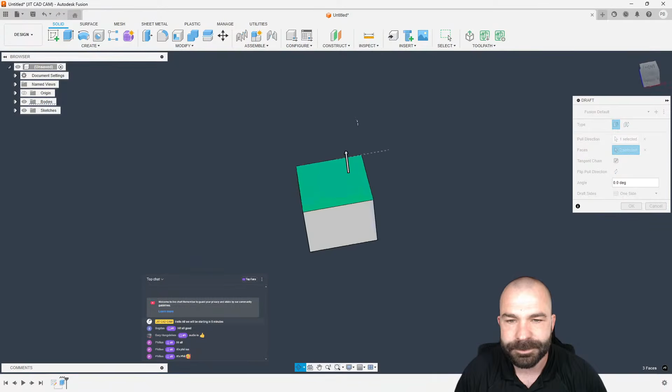But all right, so the first thing that came in just this morning is a customer reached out about tapered end mills and possibly some problems. So what I'm going to do here real quick is draw out a simple part with some tapered walls to it, and we're going to see if the simulation actually looks proper, as I was requested. So again, just a 3x2 block. We're going to throw some draft on these walls. We're just going to give it 15 degrees of draft.

Now, the toolpath that they're using is the ability to use a taper end mill on the manufacturing side of things. So let's get our setup going. We're going to have to create an end mill for this, but presumably you're going to utilize something like 2D Contour. I'm going to create a tool from scratch, and this is just going to make my life easier because it's not a flat end mill, so it should be a tapered mill. Let's scroll down through here and get a 1/4 inch diameter at the tip.

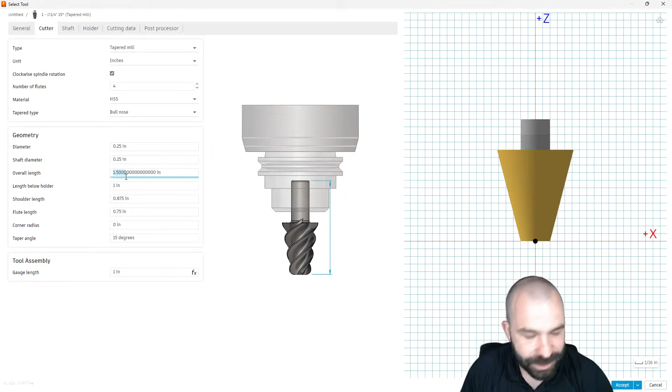Now, I think one of the problems they may have had is, I can never remember, is the tapered angle the inclusive angle or is it just the one side of it, right? So there we go, 15 degrees, no corner radius. I'm going to do a 3-inch length, 2 inches below holder. Actually, we're going to have to go a little more than that, 2.5. And a little copy and paste Hollywood magic. Who doesn't love that, right? So as you can see, there's my end mill. Let's bump that length up a little bit more.

Now, from that, we're going to go ahead and presumably be able to machine those edges that we're going to select. So again, I'm going to pick not the entire chain, but just one segment. For those of you who don't know, you could hold the Alt key and pick one edge. Now, presumably, this is where we find out what is the actual 15 degrees we're looking for here.

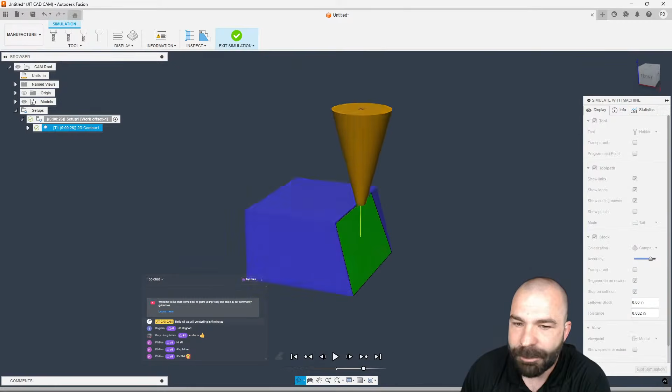Because if I go ahead and machine, the 15 degrees I plugged in was actually the taper of one side. So this would have been a 30-degree end mill. But what I'm seeing is it's actually machining and showing me everything all clear.

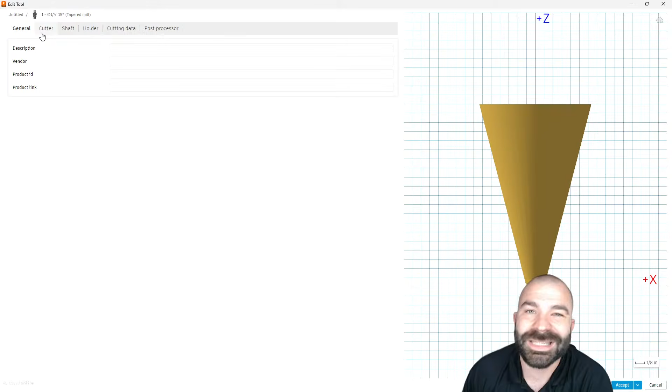Cameron, if you're out there, I know I told you we're going to kick this one off with your problem, but I could assume that maybe your tool was set wrong. I know he was also questioning, maybe I should just do this as a multi-axis swarf toolpath, and we can visit that as well. But as you're seeing here, the taper angle in this case isn't both sides inclusive. So this would actually be a 30-degree end mill. It's 15 degrees as in just one side of it.

So again, let's go ahead and lengthen our chain out now. I'm going to do a little double click here. We're going to grab that other side. And then I can go through and maybe extend that out to 50, just so we don't start our cut directly on our part. And I have my stock turned off, so let's get that stock turned on. As you guys can see, we're coming down and machining with the tapered end mill around our part.

So again, maybe that works, maybe it doesn't. Phil out there, we're just Phil. I like it, works good for me. I'm also just Phil, as most people know.

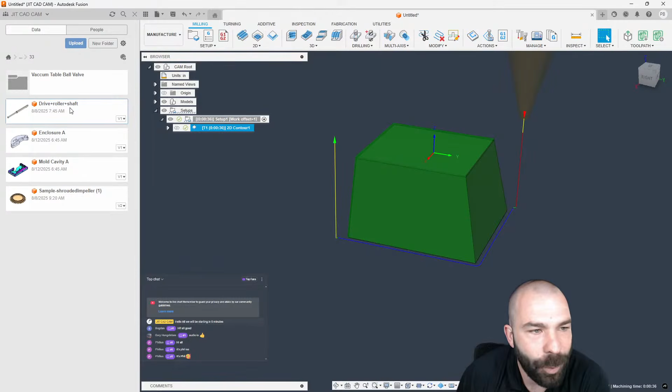Now, I'm going to go ahead and pop open this roller shaft. Something interesting about this one, as you guys are going to see, this was one of our questions submitted, again, in our ticket system. Missed the timing of last Friday, so they've been gnawing on this pretty good. But this one goes out to Joe. You guys may know Joe. He comes into our YouTube lives quite a bit, but the problem here is he is manually pulling out this bar more and more each time.

So again, the idea is that he is going to, let me just double check my notes here real quick. Yep, manually pulling in the sub pulls. Okay, so there we go. We're going to go ahead and walk through this, and I think you guys are going to like this, and I think this is going to be really good for Joe. Joe, did you make it today? If you did, let me know in chat.

But his issue is in the manufacture workspace, he is utilizing the idea that in the world of Swiss, and I'm going to say Swiss here, even though I don't believe this is actually a Swiss machine, is you tend to have a guide bushing that you're actually pushing in and pulling out your part as you're machining, right? So in the world of a normal lathe, we're actually going to use a sub spindle to pull our part out. But if you notice through his setups that are predefined, he's basically turning a little bit of the shaft, then pulling it out. Then he's going to come in, do a little bit more turning here.

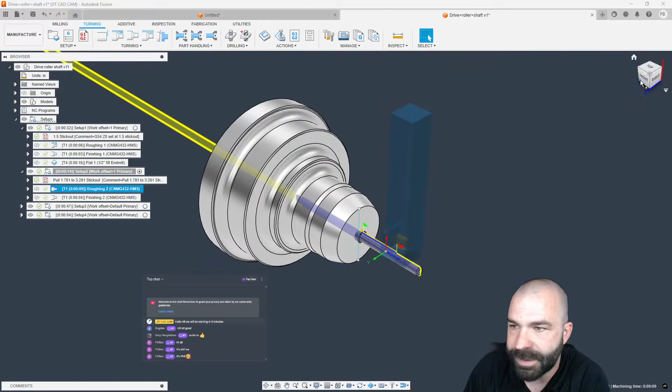So let me go ahead and click into a couple of these tool paths. As you can see, he's turned everything back to a certain point here in that first tool path. Then he's picking up the next segment of code. And then I think he's doing this a third time too. So if we go ahead and click on our next setup, you're going to notice the entire part hangs out. Again, he's doing now his cross hole and then his part off. Now he's going to flip over and grab this all in his sub spindle.

So again, this is where the first thing I would point out here is the ability to go in. And one, we need to make sure that we're working on the secondary spindle. So again, I'm going to go ahead and kick on secondary spindle.

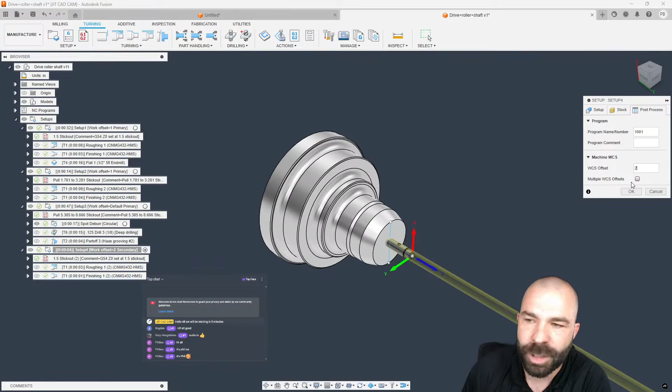Another thing I would do if I was you guys out there is go ahead and move to a separate work offset for the sub spindle. Now there's a lot of controversy here, because I've seen machines - I'm not picking on any in particular - but Mazaks and Okumas tend to do a work coordinate system shift versus utilizing a separate work offset. So again, what I'm going to do is go ahead and use a separate work offset for my sub spindle.

Now the good news is he has actually put in quite a bit of good notes here for me at the end of the day. Matt, nice to see you out there. I didn't know if you were going to make it. I did see Sean email you about this. Matt has actually reached out to us about an MSY Mazak nonetheless.

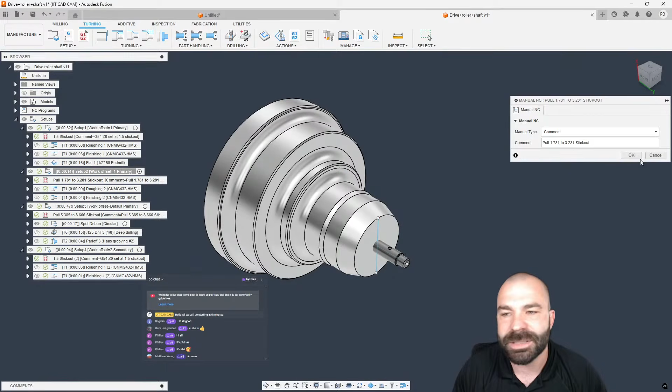As you can see, the math here is about 1.5 inch stickout. He did put this in as a comment - pull blank to blank stick out. So whether you're manually pulling this out or you're going to utilize what's called bar pull inside of Fusion, you'll notice the comments make it very easy for somebody to set this up. So again, we're going to pull a specific distance.

Let me go ahead and grab that. Then with that, I'm going to make sure my setup is active and I can go in and do a bar pull. So as you'll see here, this is where we have the ability to either compensate the toolpaths, which means shift the G code - whatever that pull distance is, we got it given to us at 1.781.

Why it's that number, guys, I don't know - I'm using what you guys provide me. Or we could actually pull to a brand new work offset. Now, again, neither one is right or wrong. The cool thing is in the world of Fusion, you have the option to go with either one.

Now, if I was doing a lot of these parts, I may pull from 54 to 55 to 56, then maybe go 59 on my sub. And that's what makes this so valuable - you can either give it a distance or we can automatically compensate those toolpaths and the G code.

So again, as you'll see me do - and we're invalid in this position - ensure you're in a turning setup. Let's go ahead and go back and see what's going on. We are doing turning, that looks good. You know what we failed to do is our bar grab to start with, so this is an error on me.

So I'm going to go ahead and go to part handling. Let's do a sub spindle grab. Again, where do we want to grab to? In this case, maybe I offset in whatever distance I plan to grab, so I'm just going to go 1 inch in.

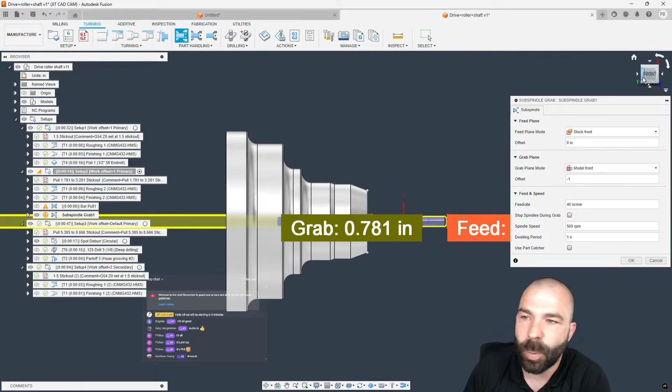And we're looking at this from the side profile. Again, a little tricky because this is a very small part, but you can see we have our grab versus our feed planes. If I rotate a little bit, so again, we feed in, then we reach in and grab 1 inch. Upon making that grab, let's go ahead and get that above our bar pull, and then we will need to regenerate these two.

So as you can see, my error hasn't gone away, because yours truly obviously went in and forgot to grab the part before we pulled the part.

But what we need to finish out now is, after this, we're going to go ahead and do a sub spindle return. We're going to unclamp the primary chuck, and I could send this to a machine position, meaning I want to send it all the way to the home position, or you could actually utilize a specific location if you have that set. So again, this is something you could actually put into play.

Now I put this in the wrong spot. So let's go ahead and drag this up, because we'd of course want to do our bar pull, sub spindle return move. Hey, it's that time again, Stuart - great to see you out there, buddy.

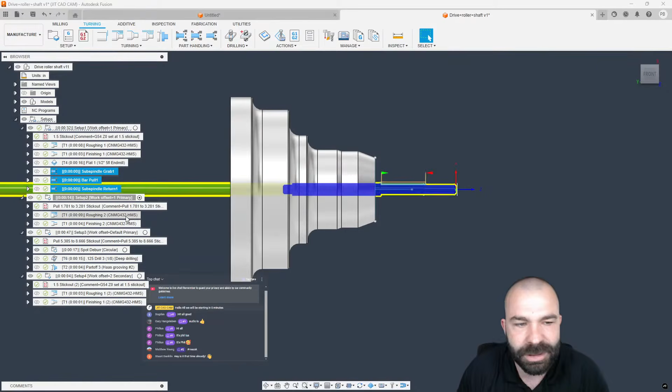But as you can see, again, as we did our grab, our bar pull, our sub spindle return - well, at this point, I can actually take my two toolpaths and drag them back up and above. Again, what I'm seeing here is he's always using offset 1 for these, which means he's still staying in the same work offset.

So I could go ahead and not delete my tool paths, but let's delete that setup out of the way.

Now, again, we have the same thing here. We need to pull to a certain location. The trick is we are pulling a specific amount, so we always need to be aware of that. He's got a pull length to get to that certain stick out, which if my math was correct, should be 1.7 plus whatever this number is, or whatever the actual dimensions he was using.

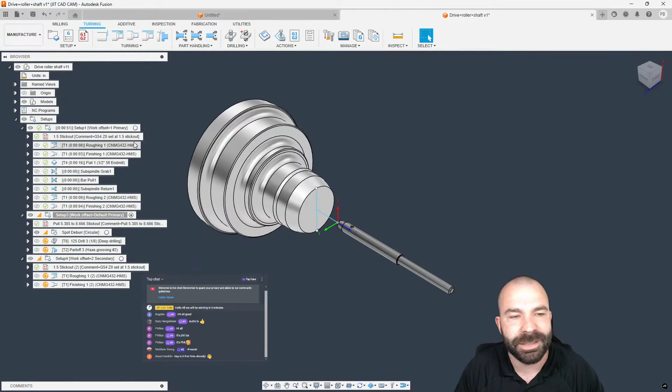I'm just winging this one, but I think you're starting to see the value here of a rinse and repeat system where I can go in and do another sub spindle grab. The problem is going to be the way we do the grab and the math of it, whether or not it's going to be compensated.

Now, this is where post edits come in. We are happy to help you guys with those post edits, but it's all still the same process. How far in do you want to grab? I want to grab in 1 inch in front of the part, so model front minus 1 inch. We're going to do our bar pull. In this case, I'm going to just plug in that 5.3 number, compensating our tool paths.

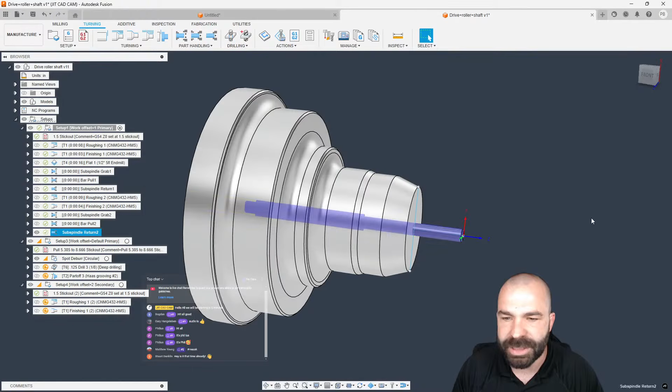And then lastly, we could do our sub spindle return all over again, back to a machine position to get out of the way. So as you're seeing me do here, I'm just going through and doing my grab moves and repositions, utilizing the Fusion toolpath side of things versus trying to break this out into multiple setups.

If you wanted to stay in the multiple setup way, I would highly recommend being able to create post-process and post-process each pull under a separate work offset. That way you could keep the original structure and still make your pull commands and then command all your tool paths from that brand new setup.

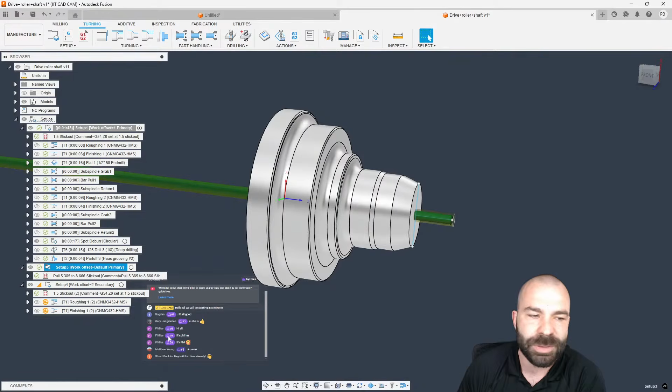But again, as you guys are seeing, I'm able to kind of stack this all down into one program. If it's something you're looking to do as well, let me back this up a little bit so I can get my setups back. You do a little undoing here.

The idea would be, give me a few more clicks here. We shouldn't be too far off from bringing some of that other stuff back. As you're seeing, everything's flipping around now. We might have to start this file from scratch. We will not in this case. So again, we have setup 1, setup 2, setup 3.

It looks like it failed to actually pull all of our tool paths, which is kind of interesting. And now I'm getting a problem where I can't select those tool paths. So let's go ahead and close this out and not save it. We might have just found a bug inside of Fusion real time, like always.

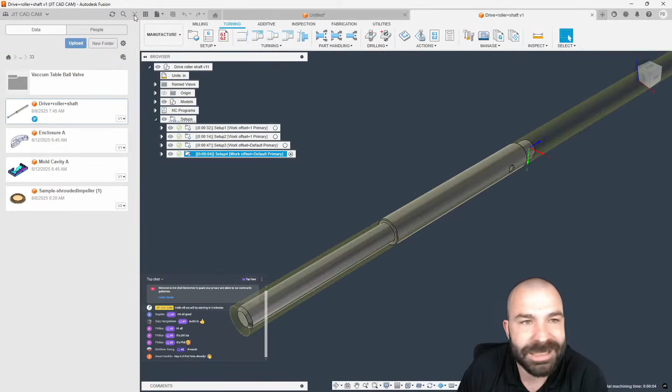I may have just simply asked too much of Fusion by backing up that far that many times. But as you guys are seeing, we're back into our original settings.

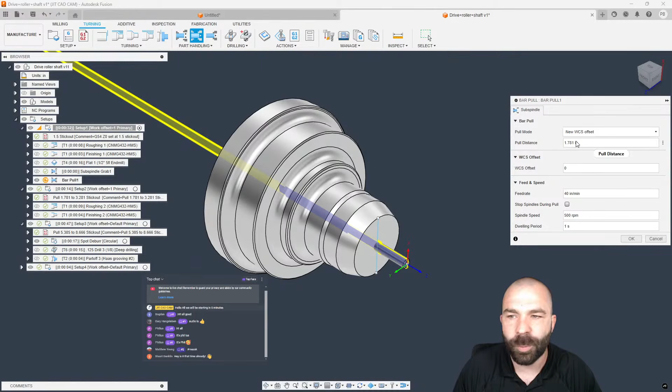So again, I could go back, do my bar sub-spindle grab, 1 inch in. From there, we're going to do a bar pull. We have our bar pull distance. If I remember, we're going to do that 1.781. This time, I could do a new work offset, and as you're going to see me do here, we're actually going to go to 2. So again, we go to our setup 2, this is going to have to now be work offset 2. And that's the idea behind it, so we can now start to daisy chain and stack things together.

So now Stuart's in the chat. Stuart, great to have you, buddy. I'm going to go ahead and now pivot and shift gears. Stuart is also one of our lovely viewers that likes to send in parts, questions, and problems all the time.

I'm going to pop out this enclosure A. For those of you that didn't catch it, I actually used this part and sent it over to the old Toolpath AI on Wednesday, and it was pretty interesting to see the results.

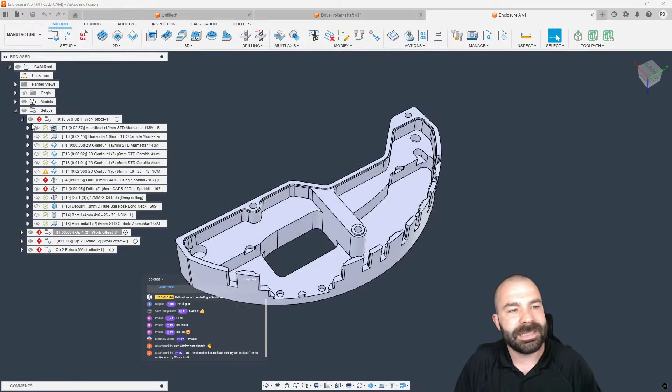The idea behind this part, as Stuart was getting into, is he was having problems once you start machining on something. I'm going to have to fix some stuff because I'm pretty sure I broke this part, so let's just start from scratch since I can recreate the problem on my end. And I shouldn't say it's a problem, because it's really not.

Here's our model. We're going to go ahead and set our Z. In this case, Z is backside, so we're going to stay in model orientation for this. Fixed size box, as you guys know, is one of my favorites. Millimeter system, not so much. But let's go ahead and hold on here real quick.

I got a question. Stuart, you mentioned isolate toolpath during your toolpath demo on Wednesday. What's that? So the isolate, unisolate feature of toolpaths, there is a bug, as they know, or something going on with the API. It wouldn't allow me to select and change and edit the toolpaths until I unisolated them, if that makes sense.

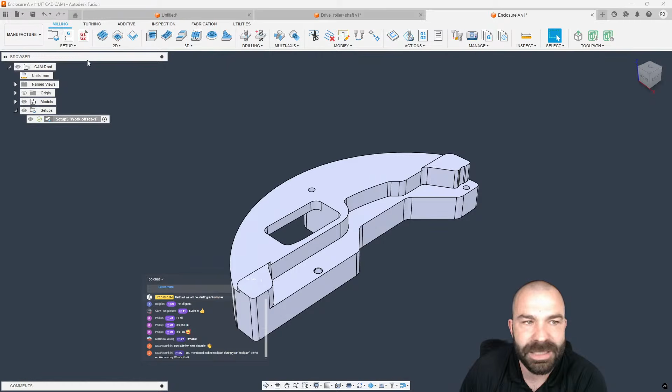So again, as you're going to see here, we're going to go ahead and start jumping into this part. Again, we're going to do the backside first. Let me go ahead and get a couple of toolpaths on here. And for those of you that didn't know, we're going to go ahead and use inch tooling on a metric part, because why not, right?

So again, let's not do 2D, let's go straight to the 3D. Swap out to my favorite tool. In this case, I don't have a favorite tool in here, so I'm trying to mentally think. A 1/2 inch end mill would be, what, about 12 millimeters.

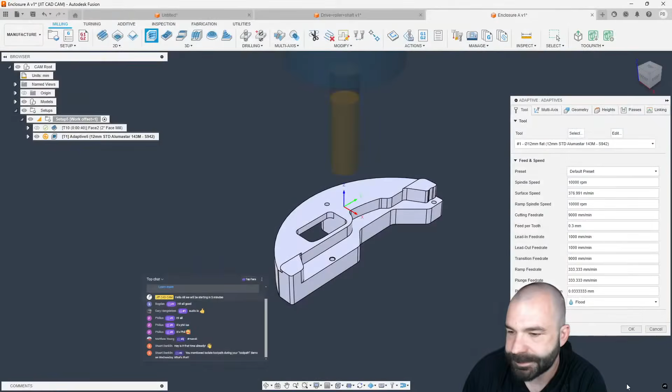And now that we've got the backside roughed out, let's just get another setup onto our other side. Again, Z-axis up. From here, I'm going to go to my stock. Again, I remind you guys of this all the time, but make sure you check the continuous rest machining box when going from setup 1 to setup 2.

And then I'm going to go ahead and steal these 2 tool paths. As you guys are seeing, I'm using a couple of Windows hotkeys, Control-C, Control-V as in Victor, just to copy and paste and start working back the other way.

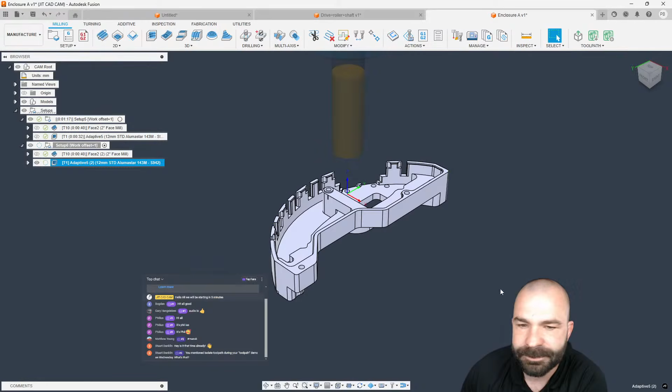Now let's make sure rest machining is working the way it should be. Remaining stock - we're going to go ahead and reduce air cutting. Now, I'd be curious as to why we are still machining around the outside, which I feel like this is a long time bug for some reason.

I would also say we probably want in the first setup to just offset minus a little bit. And again, we want to make sure we're down far enough past the bottom of our part, which should now allow our roughing back the other way to avoid the outside.

There we go. So it was on me, guys - the adaptive clearing, switching from one to the other.

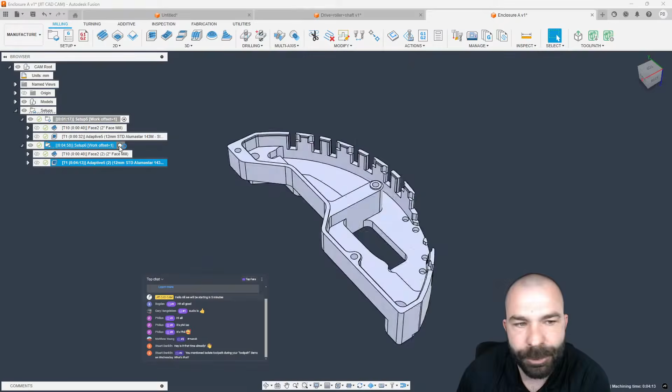But getting into the idea of where Stuart's problem was, as we start to progress in our tool paths - now I'm going to stay in adaptive clearing. I'm actually going to hit cancel here. I'm going to activate the proper setup first, and then I'm going to go back to adaptive clearing and redefine my tool.

So again, I believe he was stepping down from that 12 millimeter to say a 5 millimeter end mill. And now, with the rest machining and everything left as default, I'm a big fan of using the OK method to go ahead and get some tool paths on our part.

But the big problem is you start to get a lot of extra motions and a lot of retracts and jumping around, right? So again, this is something that's very interesting because there's a lot of ins and outs that we could do to remedy this and try to really start to cut down on things.

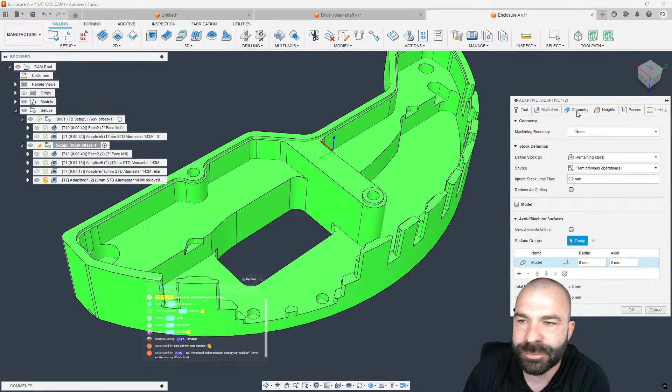Now, what I'm going to do is duplicate my toolpath, because I'm going to pivot a little bit here and start to show you guys some neat tricks I've learned over the years to help change how your roughing strategies recognize things. One of the cooler ones I've seen and heard is in your ignore stock less than, given the fact that the toolpath prior we're leaving 0.5 millimeters stock to leave everywhere.

And again, if we go to our passes tab here, you're going to see it's 0.5 millimeters. So let me just double verify that what I'm saying is correct. This might be a metric thing versus an inch thing. So it is 0.5 millimeters. So we need to be, one, aware of when we roughed prior to, what is our stock to leave.

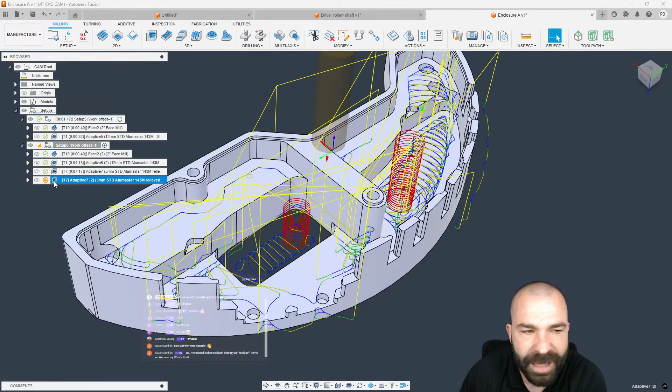So that's something very handy to remember, because with that 0.5, if we go into our next geometry, it's ignoring less than 0.2, which means presumably there's areas going to get machined that don't need to be machined. So we're going to go ahead and step that up to that 0.5 to start with. And then what we're going to see is, one, I went and looked at the wrong toolpath, so let's delete that one out. I was hoping to duplicate this, but I think rest machining is going to haunt me pretty good. We might have to just start duplicating our entire setup.

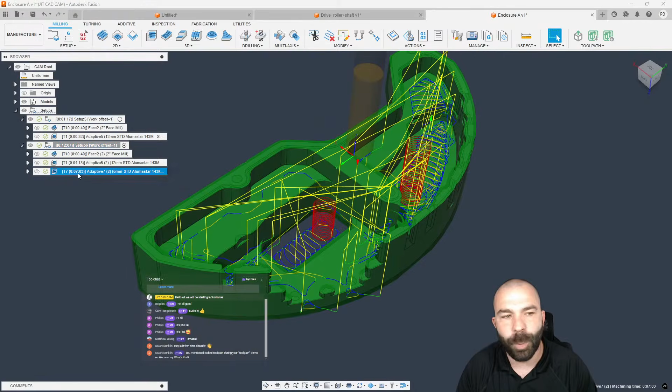So again, adaptive clearing. Yep, it is still 0.5. And then we go into our next toolpath. As you're going to see, it's already reduced a large amount of what we have going on. So let's do this here. Again, I'm going to do the old-fashioned undo everything and probably cause some problems. So that's our original toolpath. Verifying that, we still have that 0.2 stock to leave. And now I'm going to duplicate my setup.

And now, again, I think we're going to have some problems with this just because of the nature of the beast of the rest machining. It's always funny when I have to show you guys these problems in real time, how much stuff I have to completely fake out in the software to try to get what I wanted. I think we're going to see it here a little bit better. Give it a minute to calculate. So again, we have our rest machining. And then from that, let's go ahead and up that 0.2 to 0.5, right?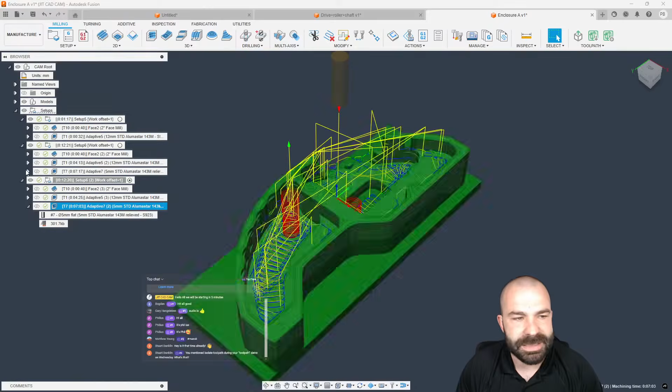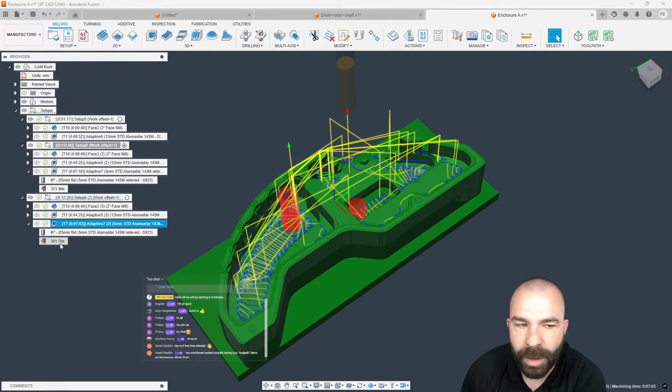Yep. So fill, it is 100%. I'm using Control-C and Control-V. Now, if you right click, you could see that you do have copy and paste right here in the window. So again, Control Charlie, Control Victor. Now you do need to paste those at the setup level. So again, when you go to the top setup, you'll notice that I can only paste at the setup level. Control D is for duplicate, which works really well.

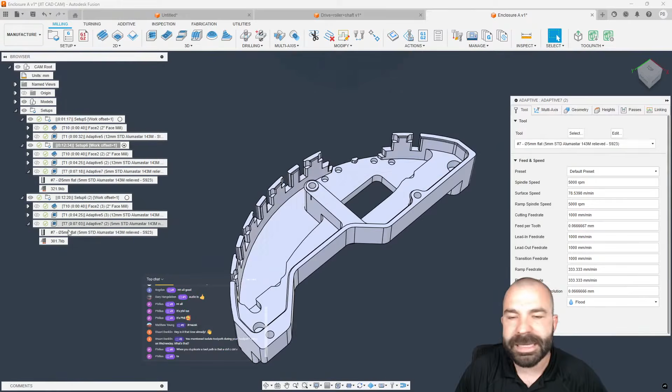So again, as you can see, nothing more than just making sure my ignore stock less than is the same number as my stock to leave of the prior toolpath, but it gets better than that. Now, this is the one that really actually made me laugh, which, me not being a millimeters guy, the process is still going to work well, because even though you have stock less than this number and our stock to leave is that number, now the real problem is there's also a buffer when you think about it. And that buffer is accommodating a tolerance. So you could presumably, in some cases, see anywhere from 0.5 out to about 0.6 in material.

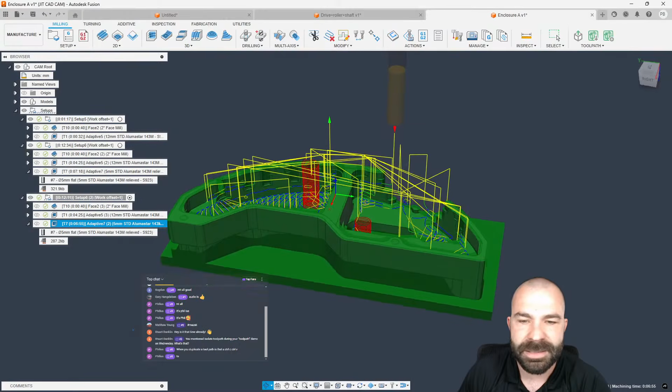So again, this is another really neat thing that if we actually go up to include tolerance on top of that stock to leave there, we should see a reduction even further, which we are. So again, now we're down to 287. Now that 287, those kilobytes basically means the toolpath is being reduced because we are not having to cut in certain areas. But again, we can take a look around our part because in a lot of these jumping around motions and helixing in, we can tweak this even further and make more and more adjustments.

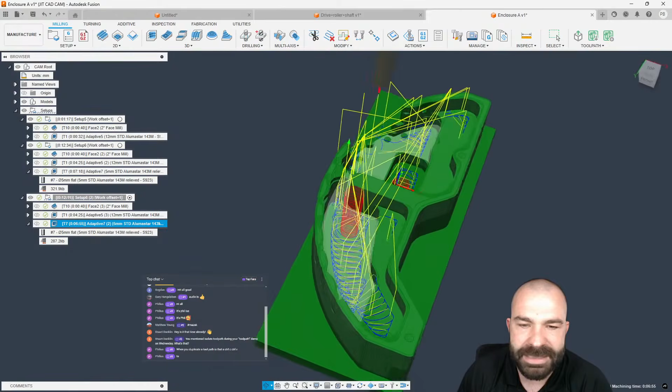And the reason I say that is because as you're going to notice in some of these corners, we may be going in and making a cut and then jumping up and then jumping here and then jumping there. So how these blue lines are currently doing things, that is something we could adjust in the passes tab. Now, some people don't realize that there's a lot of different settings that you could actually change here. Again, alluding to some really good toolpath edits.

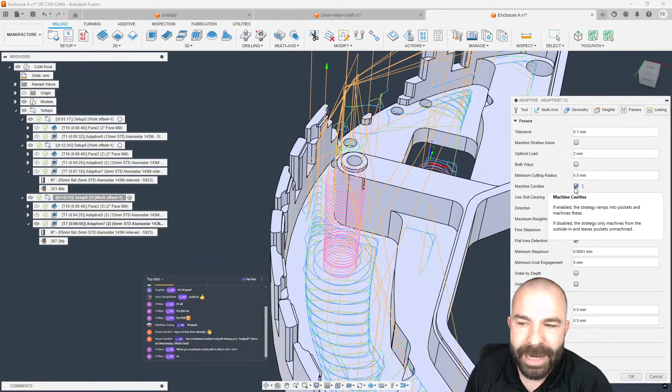For example, machine cavities right off the rip is going to any strategy that requires a ramp. That is where this comes into play. So again, if I just turn off machine cavities, you're going to notice upon hitting OK, it's now going to skip any pocket area. So again, the floor here, although that is a big pocket, I'm no longer helixing down inside of there, right?

And again, now you can see this a little bit more clear where some of us are like, you know what, why can't we just stay in this corner and do everything? Why are we jumping out of this corner to go somewhere else and come back here later? That's all still adjustable as well. So again, going back into our toolpath area, we could go all the way to our passes tab.

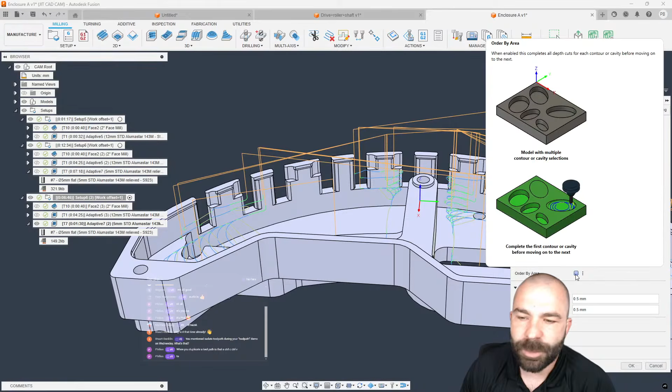A little bit further down, as you guys can see, you could force order by depth, meaning machine everything and anything within the confines of the same Z-axis consistently, or machine by area. So again, we're going to go ahead and order by area this time around. Now, I like to pay attention to, again, the kilobytes of data, because if they go up or if they go down, we could see a difference.

Now, you're going to notice a difference here where these yellow lines particularly are, because instead of us retracting up and jumping all the way over and jumping back and jumping here and jumping there, what you notice is we're still staying right here in this area. Yes, there's a little machine here. There's some there. We're jumping up. We're jumping over. You know, why can't we start to get things to link together a little cleaner? Well, that's the case where it's a non-blue line problem.

So again, we could go back into our toolpath. And as I tell most people, you pay attention to the colors. The passes tab gives you blue lines. Well, the linking tab is basically everything but blue lines. And the reason why I say everything but is because there's no red here in linking, but red does lead to ramp type and style. So again, this is where we could play that game.

Linking, those are linking moves. We can simply go in and minimum retract those guys. Again, small changes make big differences in a lot of cases. Go ahead and hit OK one more time and see what we get.

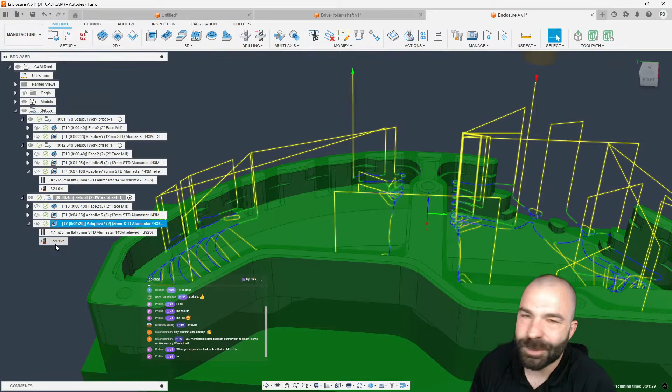Now, when it comes to linking, you may or may not see a good amount of kilobytes reduction. And I say that because instead of us constantly going all the way up in Z and back over, if you think about these points, right, we would have up, over, down. It's still the same number of points, but it's the location that these points are being generated at.

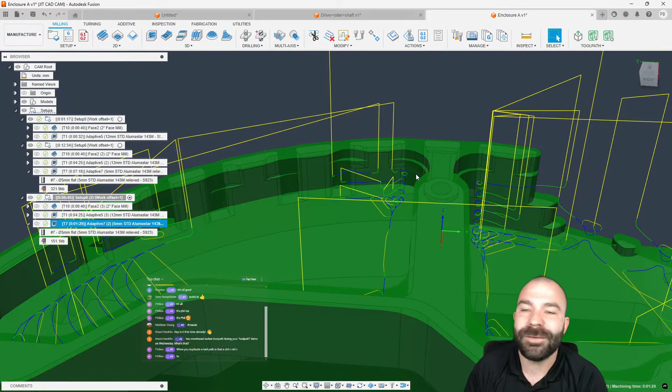So again, we can tweak this even further. Now, this is where, in my opinion, I might start to do a lot more things, which would be, for example, maybe I don't want vertical lead-ins. I know because we turned off machine cavities in the passes tab, I don't need a helical ramp style. I could actually start doing things like plunging, right?

So again, although plunge does still have a ramp clearance after the fact, anywhere that it cannot plunge, it would still do a helical approach, but we can adjust things down further and further.

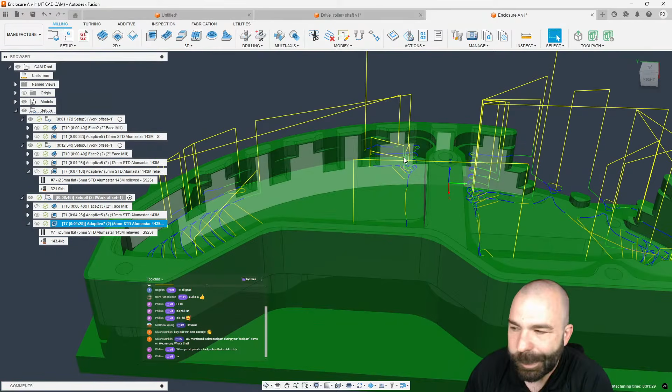So again, we go ahead and hit OK. What I'm really looking for is to streamline, as you guys can see, some of these yellow areas. We're still jumping up and back down, but we're no longer doing our vertical lead in and lead out arcs. Now, there's going to be a point when you work at it this way that there's only so much you're going to be able to get out of the toolpath.

But again, it's nothing more than that rinse and repeat of looking at our linking tab. You have things like a maximum stay down, which will reduce how high that tool retracts up. You have also your minimum stay down clearances. How close are you going to allow that stay down move when it is down at its lowest? And things from there, again, we could go to least, to most.

As you guys will see, though, when you actually start adjusting these, be careful, because there is a note that when you increase with high levels, it will actually take more calculation time. But as you'll see, we could go through and click a few more things there as well. So again, we're going to let this calculate out. We really didn't see a dramatic change in anything. Again, utilizing least, most, things like that. You will notice over here, though, we are rapiding across the part versus retracting out of the part as well.

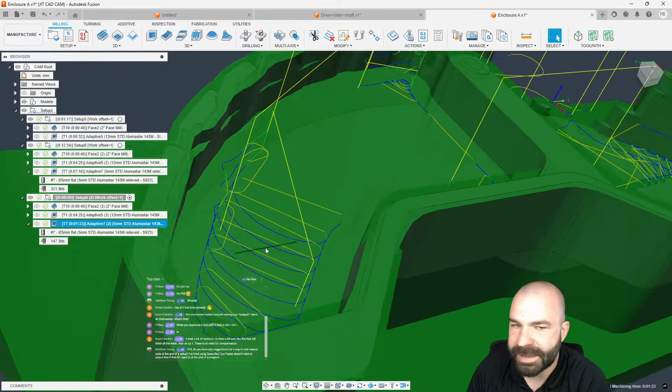So I do see a couple of questions coming in. Stuart, it looks like a lot of contours. Is there a 3D path like flat that will finish all the walls? Also on Op1, there is no need for compensation. Yep. So I was getting to that, Stuart. Matt, let's go ahead and see. Do you have any suggestions for a way to add manual code at the end of a setup? Yes, I will get to you here in a second, Matt. Jeff from Trinity, great to see you out there.

So now is when we start to talk about, as Stuart is asking, how can I finish up this part? Well, the good news is, if I have a strategy in roughing, I'm going to go ahead and derive out, but I would go for 3D contour if compensation wasn't a big deal. Now, when is compensation a big deal? This is arguable. I tell most people when you're sub 1 thou tolerance, compensation is probably a needed item, or if you're running large production.

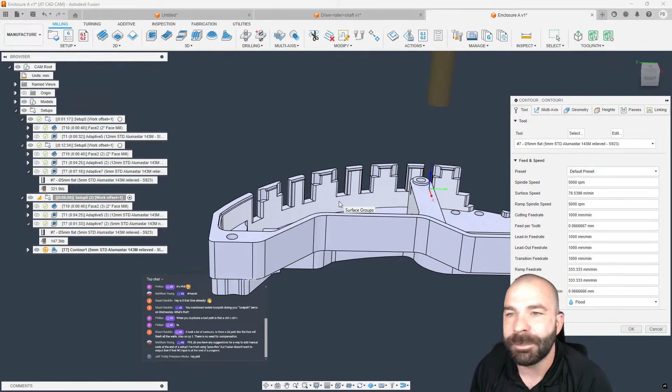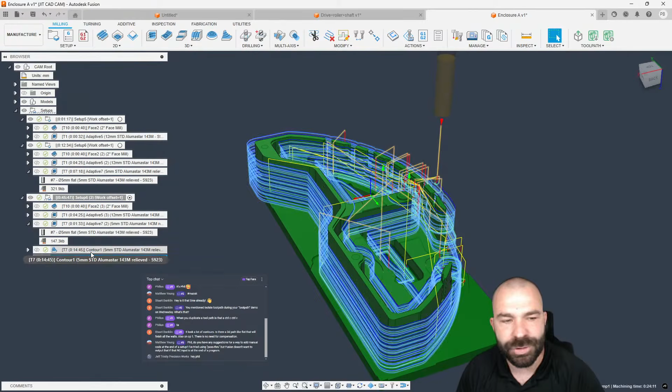So what you're going to see me do here is nothing more than 3D contour. I'm going to go ahead and allow my tool to go all the way outside of the boundary. And by default, let's get a toolpath on the part and see what we can come up with. So it's not ideal at the moment, but there are a lot of things you can do to fix and adjust this. So one is I'm using contour. Well, sometimes switching gears to a ramp toolpath may also get you quite good results when you consider how little moving around you actually have going on. So again, both are very similar. So we're not seeing a big change there.

But again, based on how the blue lines are doing everything, a lot of people forget that you have a lot of different things like flat area detection, your maximum step down versus a minimum step down. All of that starts to come into play when you're trying to automate the process and the systems. So as you're going to see, we do have a maximum step down in this case. Now this tool, I think, was a 5mm tool. We're just going to go ahead and say a 5mm step down. If you turn off or turn on flat area detection, that will help a lot in different areas and different types of settings. Again, we're going to go ahead and hit OK.

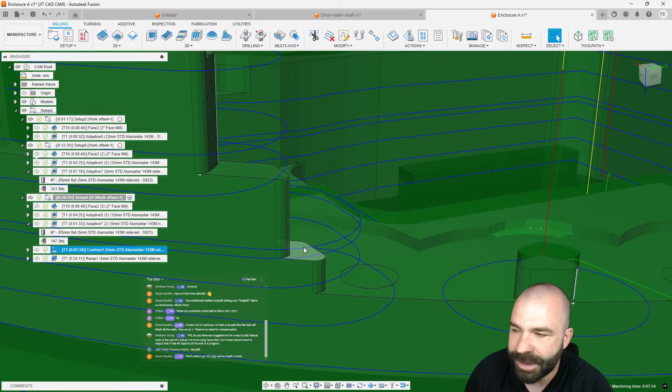And as you're going to see, we're now making a much larger step down. And because we are using flat area detection, we could be adding back additional toolpaths for no reason. Now, where you're going to see that, and it's kind of interesting, is if you notice I come around this corner, well, from this layer to this layer, let's say it is 5mm, but this layer here might only be 1mm. That is that flat area detection coming in. So again, if I go back out there and I say I'm not going to use flat area detection, we should see now that we're actually skipping some of those toolpaths.

Now, this could be good or bad. Yes, sometimes you'll need it. No, sometimes you won't. But as you're noticing here, it's a lot less step downs because, again, in the world of Z heights of this part, there's just a lot of flat areas to come around and find. The problem is it's trying to machine all of those in one shot.

Now, again, you could go back through this a little bit more. Depending on what you're trying to do, you have things like order bottom up if you wanted to work from the bottom of your part upwards and things of that nature. Now, given the fact, as you guys are seeing, 3D is so dedicated to being such a model-driven toolpath, there's still going to be things on this part you may want to do prior to help also cut down

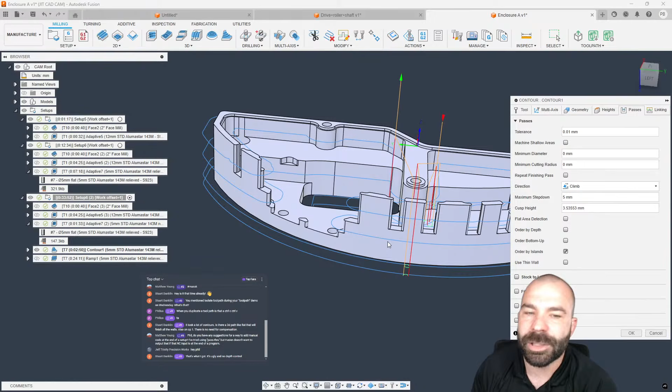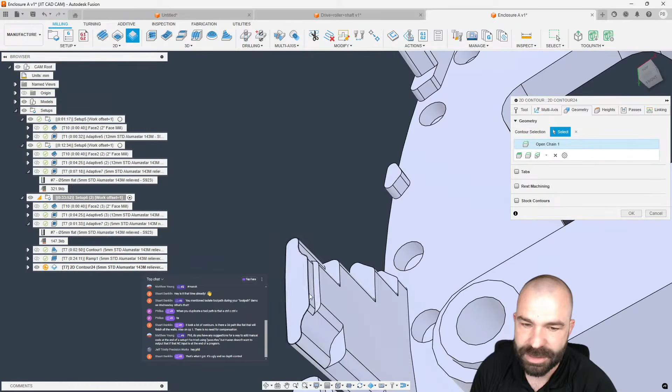on this toolpath. So again, as you're seeing me do with a 3D toolpath, I could possibly finish my floors ahead of time. That would help alleviate some of the material, or something as simple as throwing some simpler 2D toolpaths. So as you guys are seeing me do here, I'm going to go around and grab a couple of these spots. But to me, I think the big thing that I would consider if I was doing a part like this, Stuart, is what is the advantage of cycle time, right?

Am I happy with a heavier step down, or do I want to go back to that other concept of let's go in, let's actually get the flat areas all in one shot? Again, is it going to affect me having 2 additional minutes of cycle time in this case, right? That's where my decisions come from.

As we teach most people, we always start training off in 2D toolpaths, then you wise up and you get in the world of 3D, as you guys see me using here a lot. Well, when you're really getting into production and high volume stuff, you're concerned about cycle time, which usually you find yourself back in the world of 2D. So the question I would have for Stuart here is, are you worried about cycle time because of quantity, or are you willing to let the cycle time float around a little bit more?

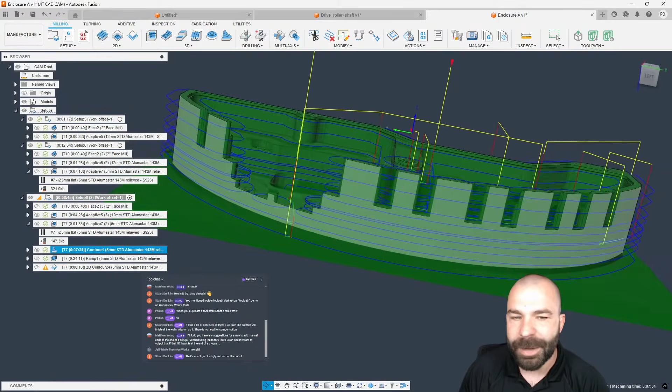Because again, something like this toolpath, although it may be making a couple additional paths I don't like. Now, for those of you out there wondering, I did not finish up the floors like I should have, but overall this toolpath is doing quite a bit. And if I was to go in after the fact and hit this again, one more time around, another contour, smaller tool, right? So we're going to go down from a 5. You have anything down like a 2.

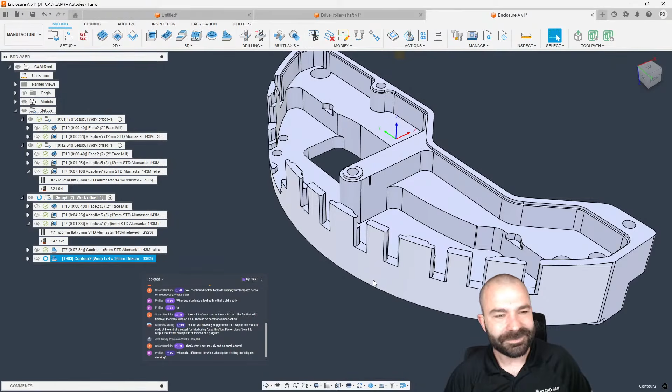Again, with our rest machining, trying to eliminate as much as possible, right? So again, we're getting a lot of additional moves, as you guys are seeing. Some of that can be attributed to not having rest machining turned on, as yours truly did. So we can go ahead and hit OK. And again, you could play that game of no flat area detection in the toolpath prior to, and allow the next toolpath to pick up on that.

So again, go ahead and let me know, Stuart. Cycle time was an hour. Toolpath generated a cycle time of 5 minutes. So I don't know about that much. Keep in mind, I don't know much about your machine.

But I did see one recently. There's some guy on YouTube who makes a bunch of YouTube shorts. They had a 4-to-1 ratio spindle speeder for live tooling on the lathe, and it might be the best thing I've ever seen.

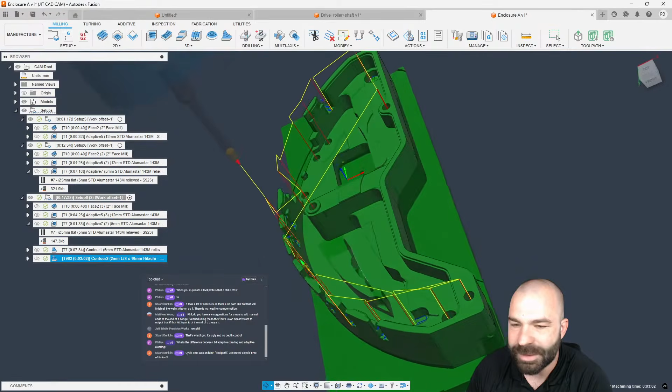So again, getting down there further and further. Now we play that game. Do you want to bring that tool up, jump around a bunch? As you're seeing, it's actually staying down in this pocket. It's not doing retracts till the end. So I just went from what you provided, 5mm tool, straight into that 2mm tool, and just let the software do the work for me.

Now, again, I still might want to, at the end of the day, still do an adaptive clearing. We're going to go ahead and reorder this because I'm going to drag that up because I want that smaller end mill to now rough out. And then I want that smaller tool to go ahead and hit contour after the fact.

So Phil out there asking, what's the difference between 2D adaptive clearing and adaptive clearing? So as you're going to see, Phil, the big difference is in the world of 2D, you're defining what you want to machine.

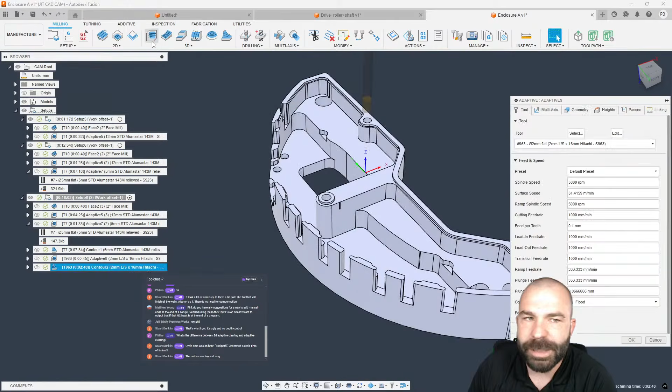So again, geometry wise, I need to pick the edges of the model because I need to tell the software what is actually being physically done. Now in the world of 3D, everything in the geometry side of things is actually driven by the model. And what you're going to notice is it's a boundary game: where do you want to machine within, not what do you want to machine to, because the model is what we're machining to, if that makes sense.

So the cutter was tiny and long. Yeah, that's just the nature of the beast on parts like this, man. You always try to find what is the biggest cutter that you could fit through there. I think I'm representing it right here.

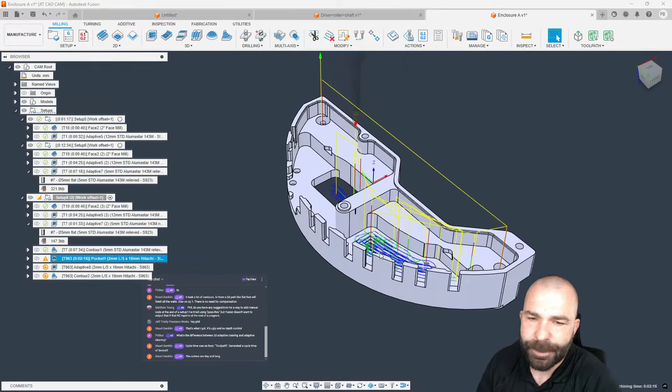This is, again, like when Stuart reached out to me, I said, what would happen if instead of using adaptive clearing, why not use something like pocket clearing? So if we went in and said pocket clearing instead, I'm going to drag this up and regenerate this, and you'll notice pocket clearing. The strategy for pocket clearing is working in a constant step down to rough things out. Now some of you are probably already questioning why we're not getting into certain areas.

Again, everything is based off anything from stock to leave, to the rest machining and how it's being calculated. So as you guys can see, I went ahead and reduced my stock to leave. Now, if a customer is not too concerned at all about this, you'll notice I could actually get away with using something like pocket clearing to do the entire part, with no stock to leave.

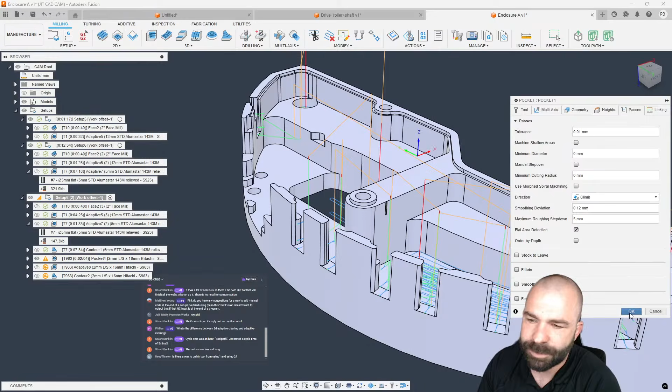I would recommend upping your tolerance a little bit just to get you a little closer and more precise to your part. So excuse me real quick, guys, I know I'm a little winded here on this explanation.

But as you can see, presumably I could get away with using rest machining and pocket clearing to actually finish the walls. Now, I don't recommend this in most cases. I know a lot of guys in the world of woodworking, they use a tape measure tolerance. It's a different scenario and a different way to think about it.

So I'm going to go ahead and jump back here. Matt, I know you had a question about post-processing with pass-through. Was that on your actual Mazak machine? Go ahead and let me know in the chat.

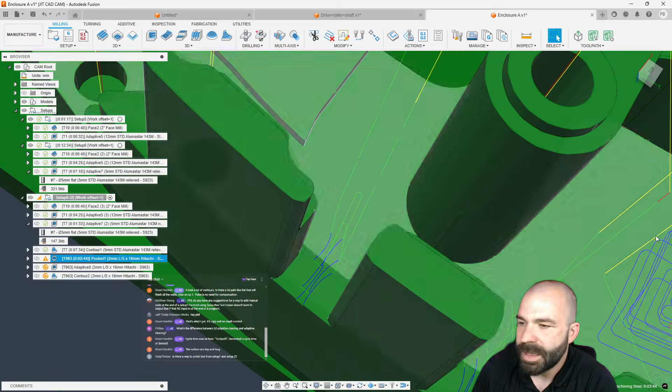Outside of that, is there a way to unlink tool from setup 1 and setup 2? Unlink - I would be curious to see what you're requiring there, Deep Thinker, about the unlink command.

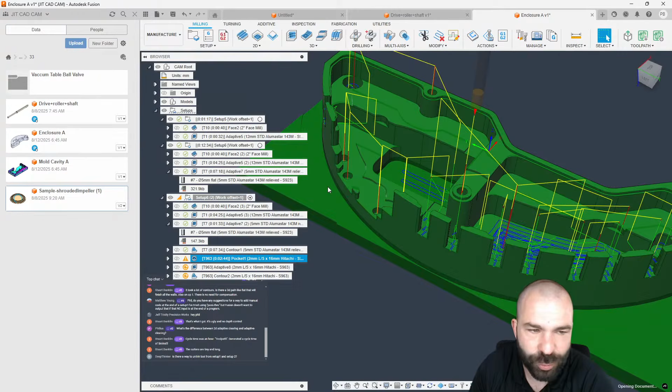So actually, I do have this shrouded impeller. Now, I already have some tool paths on this part, so what I'm really looking for is just to come in, and we're going to go ahead and add a manual NC pass-through, and make sure that it's even inside of the software, so I always like to hit this with test.

I'm not going to call out Stuart, but Stuart, I remember there was something about a lot of beers for working through that part. I'm kidding, of course. Appreciate the super chat, but let's go ahead and post this out and see what we get.

I'm going to post it with a simpler toolpath because I don't want a mile's worth of code. So let's go ahead and go into the default Fusion library.

And we are looking for an MSY, and that is a Mazak. Now, if I remember, it was possibly a QTU, which does have the smooth controller, or it was the Mazak Quick Turn, which also has the smooth controller. Either one's going to make it so that we post out code, and we'll take a look if the pass-through even comes through.

But as you guys can see, we went ahead and posted that code. And if I look down at the bottom of my code here, based on that one, we are getting the pass-through function. As I tell most people, you want to make sure that you have the latest version of the post, unless you have post edits, right?

So I know we make a lot of edits for you guys out there. You may have to go in and change some things. Just be aware of grabbing the latest and greatest version of a post, and I'll show you guys how to do this. If I go into my post library right now, you're going to notice in my lovely folder of stuff that never makes it out to the public, that I trash here in real time, as you're going to see, I can go over here to this lovely little bell that says there's a newer version of this post. Well, I can ignore it, or I can hit OK.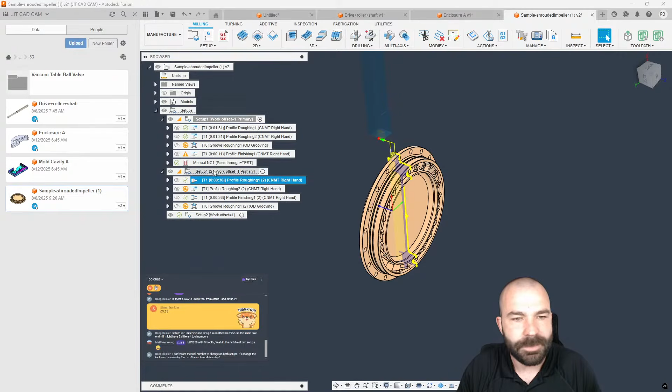We're going to grab this first one, I'm going to grab the second one. Let's make sure we're using that smooth controller, of course. We're going to go ahead and swap out to the smooth controller, re-post process. And with that, I hate to be the bearer of bad news, but Matthew, it looks like we're still utilizing that manual NC pass-through. So we may need to do a little bit more diving into your post processor and get an idea of what is the issue or what's going on.

So we're going to go ahead and switch gears here. Matt, if that is not the case, go ahead and let me know. Like I said, I would grab the latest and greatest, because to me, pass-through is working in its current stage. Now you may have certain toolpaths that you're doing that could still cause that problem. But we're going to go ahead and switch gears here.

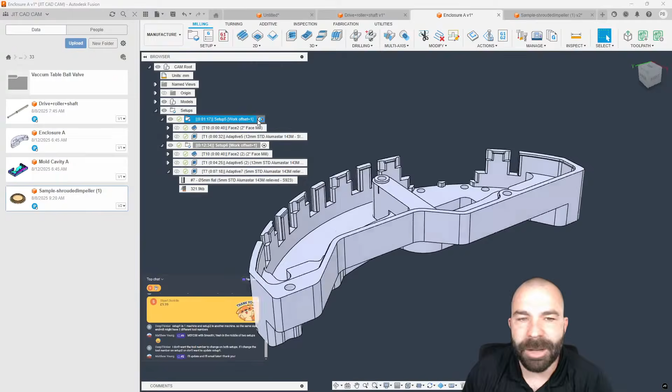So what I would recommend in the use case of Deep Thinker, I'm going to go ahead and go back. Now, in the case of this part, again, good example, setup 1, setup 2. Let's get rid of these other, or actually, we just need to get rid of this one. So again, here's a good use case that maybe, let's say for example, I'm going to put this on, you know, the old dinosaur in the corner to deck off the top and do the simpler stuff, right? And then I'm going to move it over to a different machine later.

The problem is things like tool numbers as well as speeds and feeds are going to change based on the machine, right? So what I would recommend when you go into your post library and start to organize things - not post library, what am I doing - tool library, maybe I had too many before this. No, I'm just kidding, guys. Is I would recommend setting up, in this case, your shop crib.

Now, this is a use case that I would use, right? So again, you guys are going to notice I have a couple of shop cribs here. So as you can see, I have one for milling technically. Well, my tooling inside of my shop crib shouldn't have any tool numbers associated with it, because that would allow you to place this on either machine and give it whatever number you want.

Now, like we were talking about, let's say I have a VF2 and then I'm going to go in and say new library. Let's just say we're going to move this to, let's go to the DVF, right? DVF 5000. It's been a while since I picked on somebody other than Haas, right? We went to the 500.

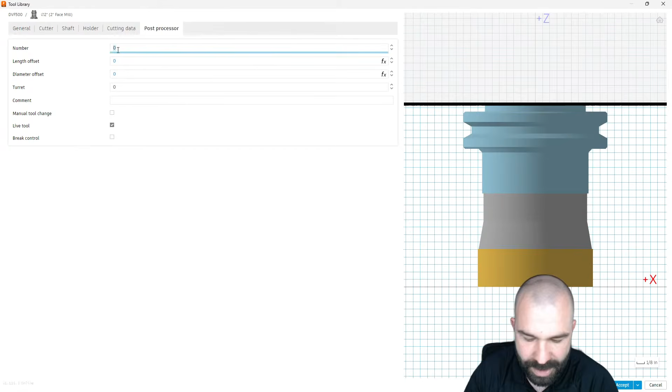We got the smaller model, but the idea when grabbing tools is I could grab these out of the default library, or I could copy the tool, paste it, and then edit my tool number. In this case I'd like this to be number 99. Upon doing so, we could move it over into our toolpath as a whole. When I go into facing the other side of this part, I'd select that tool, and you'll notice I jump down to that DVF 500 and grab that 2-inch face mill. Now you'll notice I have tool 99 over here while I still have tool 10 over there.

Watch your video at 0.5 speed and it's like you've had too many. We could slow it down for anybody getting lost in the back. Let me check my ticket system, guys. I don't see any tickets coming in, but I see a ton of people sitting here doing absolutely nothing. I don't know which one of you guys are putting bots in my chat, but thanks, I'll take the free viewership any time.

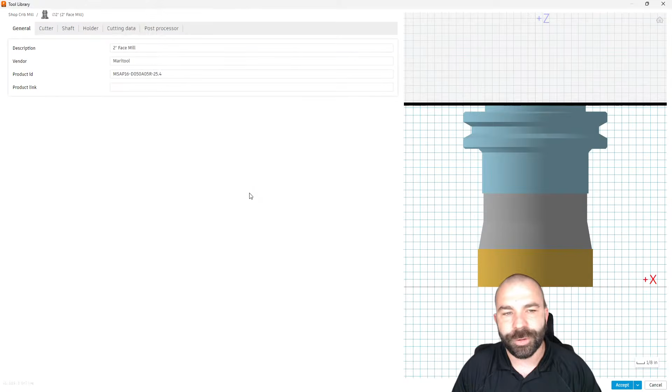As you're seeing, the easiest way to do this right now, and this is just me, is to set this up in your tool library. If I go back to that shop crib down here, for demonstration purposes let's make sure this is shop crib mill. You could have made a shop crib folder and then had mill versus lathe, however you guys plan to organize this. But at the tool level, I'd go to my cutting data. As you can see, I have 6061F. Maybe I rename this to the VF4, and then create a new one, 6061F, and this might be my VF2 or Fadal. So I can now drive this based on different parameters. I know on the Fadal, that machine only goes about 6,200 RPMs because the bearings are shot, so the cutting feed rate's going to be more like 40, and so on.

You gotta watch everything at 1.75 speed to get through it. Yeah, I know my content's got a lot of filler in there, right?

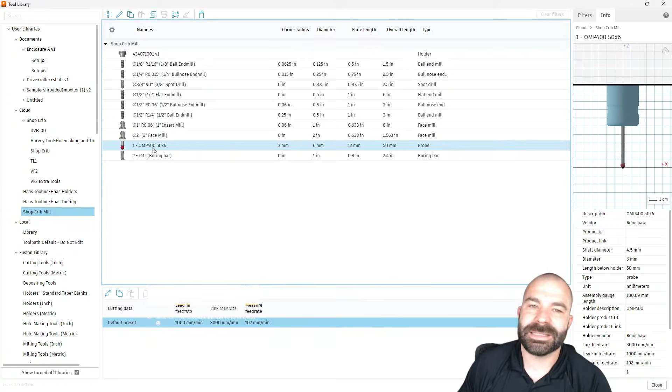As you guys are seeing, this would just be my recommendation: when we're talking about your shop crib, I personally wouldn't put tool numbers on my tools, because that's one of the last things in the process I find myself doing. But it makes it very easy to jump and grab specific speeds and feeds based on each individual machine, and then set your tool number later when you go to run your program.

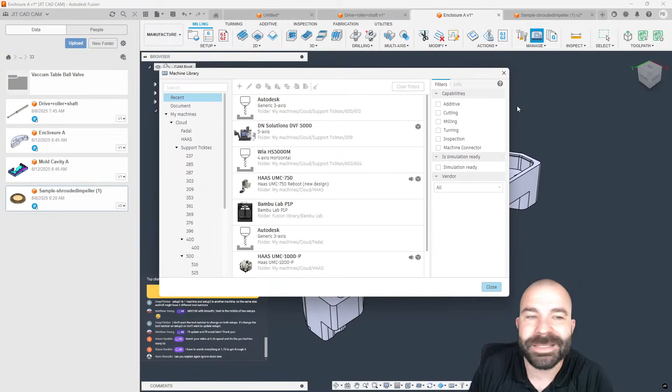So hopefully in the future, I don't know the full extent of it, but it would be cool, Autodesk—I'm putting a marker here—if given that I'm utilizing machines in my cloud, why can't I tie a tool to the machine from the cloud? I think a lot of people are in that mindset: if I'm machining something and select a machine, maybe we start to see a set of tools pushing and pulling from the machine, since it's already in the cloud, already somewhere I could store stuff. Correct me in chat if I'm wrong, but going back to my tool library, I'd love to see the actual machine documented right here. This would be cool versus setup 5, setup 6—why can't we see the machine? We can see everything and anything, but not the machine right here. It'd be neat to see the actual tools against the machine itself, which would also let you pull max spindle RPM and things like that. Who knows—I've seen some cool things they're doing in the background of Fusion.

If you guys aren't part of the Insider program, this is my disclaimer: I recommend you get on the Insider program. It's really neat to see certain things coming out. For those who don't know, I'll give you a little peek here, down where it says preview features.

I'm not going to click it because I don't want you to see what's in there. You get the preview features of things that may or may not come out inside of Fusion, and get an inside look at some other things outside of that.

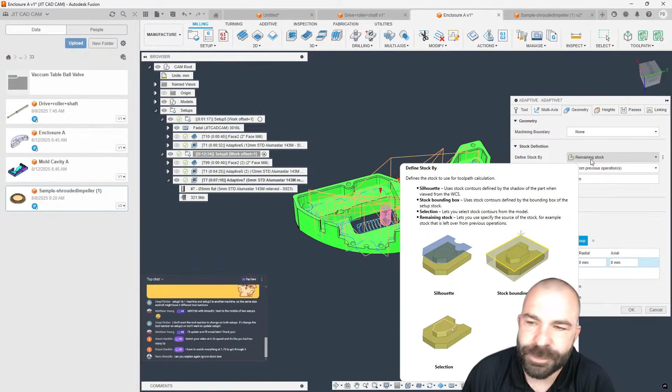Explain ignore stock less than again. Sure, no problem, Nuno, I got you buddy. The whole idea of ignore stock less than is in the event that we are looking at remaining stock. This is a model in the background of Fusion. From that stock, what is the limitation of what you do want to machine versus what you don't want to machine? A better example of this would be, let's say I'm going to go ahead and do this a little quicker here.

We're going to go ahead and do our contour with that big end mill, and then I'm going to derive out my, let's see here, we're going to go ahead and do our 3D milling contour. So again, there's our large tool, and here's our small tool to go find all the areas that the large tool didn't cut, right?

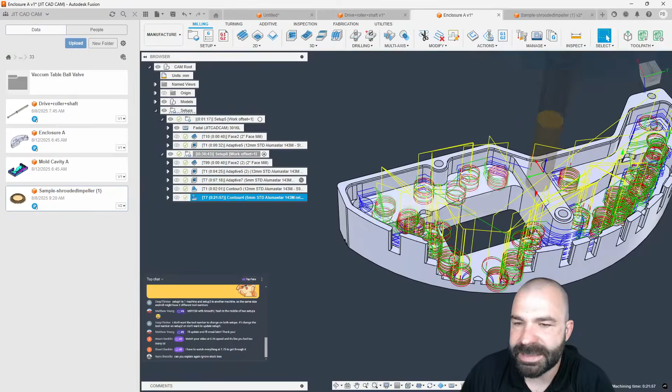Well, the problem is once I turn on rest machining, by default we have a minimum threshold to worry about. And as you're going to see, that ignore stock less than kind of scenario comes into play. Now some of us may or may not know there's probably a little bit more lenience there because, one, we're working with a tolerance of a tenth, or not a tenth.

What is this in millimeters? 0.01 millimeters, that's what I'm going to say. Is that a micron? Somebody put it in chat. Oh man, my screen just went blurry here. And I'm back, you guys are still out there I hope. I just got flashbanged by my own monitors.

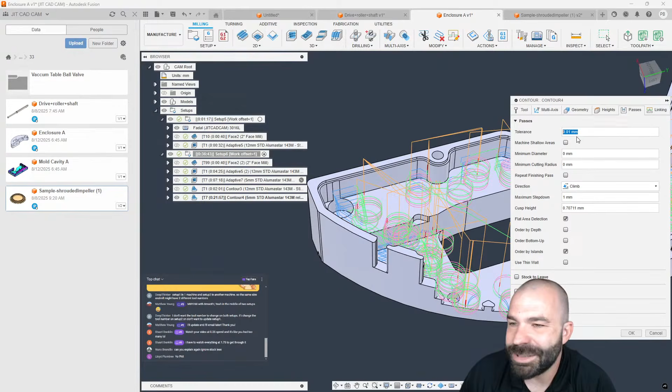But as you guys can see, again we have that tolerance, but in this case our ignore stock less than, technically we've machined all these walls to 0, right? So anywhere that big end mill touched is going to be 0. Now if I was to actually enter 0 in here, you'll notice it's going to start to extend out my tool path because it doesn't know where there is and where there isn't actual machined surfaces. Again, if you were to increase that ignore stock less than, let's say we go out to 0.1 - micron is 0.001 millimeters - you're going to notice now that gets shorter and shorter.

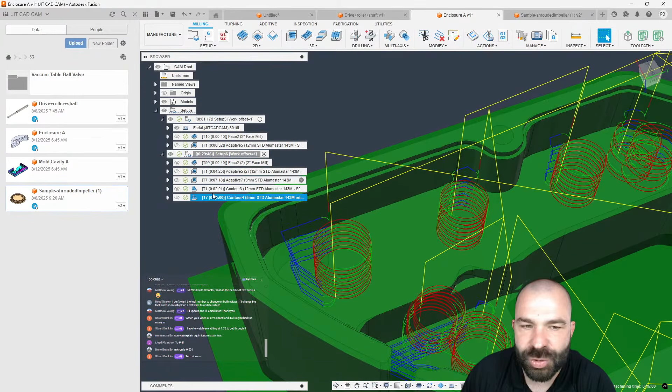And the reason why that's getting shorter and shorter is because when we look at - and this is going to be tricky to see, so let's turn off transparent - we might actually be able to see it from here, I think. If you guys notice, that big end mill can't get all the way back in these corners, but there's a point where that end mill stops, right? And you're seeing that in this radius, but that radius is where you're basically seeing those different variances in stock to leave come through.

So ignore less than, 0.1 or 0.01 - again that's when that tool path is going to start in. So again, awesome, I'm glad to see that you're getting it. That's great, that's the whole purpose of this stuff at the end of the day. I'm seeing a bunch of different things come through.

Let's see here, I gotta double check a few things here.

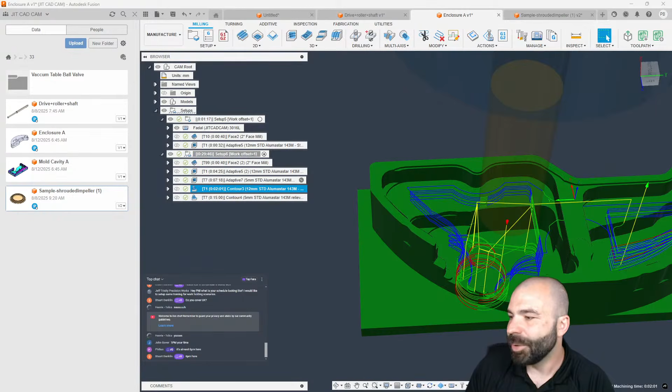I'm going to go ahead and scrub this one more time. Give me 1 sec here. Anybody? I'm not seeing anything. Alrighty. How long have we been going? Has it been an hour? It's been an hour and 6 minutes. We're just under an hour from when I started this. Going once, going twice. I'm going to start the outro. You guys ready for it? This is usually when you guys start talking in chat. I'll wait.